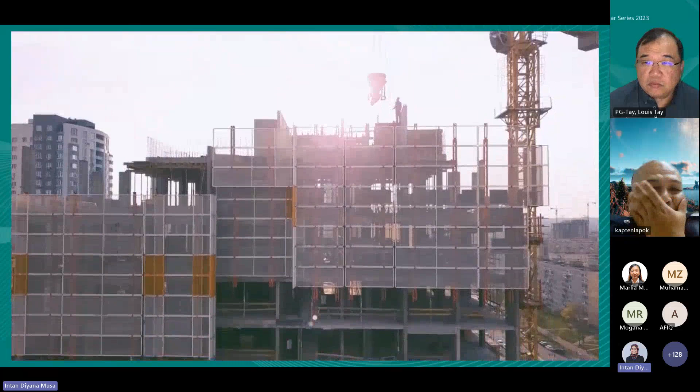Established in 2004, Construction Research Institute of Malaysia, mostly known as CREAM, is a subsidiary of Construction Industry Development Board, or CIDB, that holds the responsibility over all matters related to the planning, implementation, and management of the research and development projects and related activities.

With its mission to make CREAM globally recognized as the leading institute for research and development, R&D, and its vision to meet the strategic needs of R&D in the Malaysian construction industry, CREAM is committed to fulfilling its 5 objectives: to fund, manage, and execute research activities and programs; offer tests and laboratory facilities for heavy structure engineering and building materials that focus on IBS structures and components; establish R&D cooperation with stakeholders in the domestic and overseas construction industry.

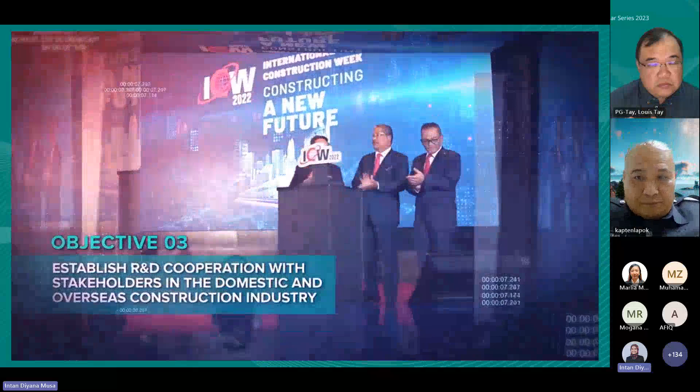Earn funds and offer ventures for R&D activities and programs, and distribute the latest technology and R&D products to the national construction industry players through promotion, patent, and commercialization.

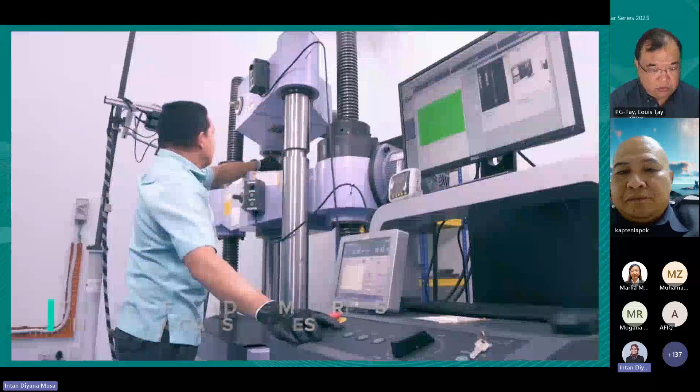CREAM serves as a key center that provides 3 main functions, namely research and development, testing of building materials and technical services, and assessment and certification.

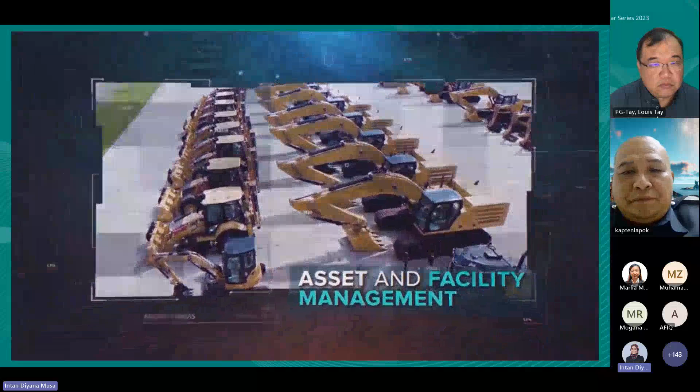CREAM's main focus is the R&D program, which covers various fields. Its objective is to provide benefits to the progress of the nation's construction industry. The research themes cover 5 priority areas: structural and material engineering, innovation and digitization technology, asset and facility management, environmental sustainability, and productivity.

Quality of service has always been CREAM's core value. This is to ensure that the Malaysian construction industry's strategic R&D needs are met.

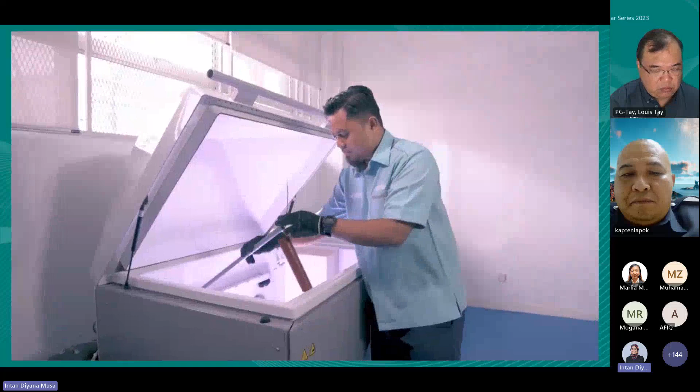CREAM also provides testing services for material and building structure samples at its laboratory, Makmal Kerja Raya Malaysia, or MKRM. The purpose of this testing service is to assess quality and safety, as well as to improve materials and construction samples to meet the standards set.

CREAM also offers services and other technical aspects such as inspection and sampling of imported building materials entering the country's ports. CREAM will conduct forensic investigations on construction sites in the event of failures or accidents.

CREAM is pleased to announce that the MKRM has been expanded to Sabah and Sarawak, and that it is now ready to assist industry players in Borneo with construction material and structural testing in accordance with CIDB Act 520.

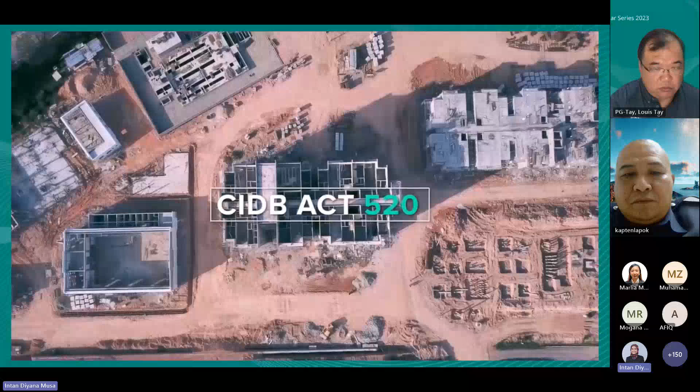CREAM Certification Services, CCS, provides construction certification services primarily for building materials listed in the CIDB Act 520. CCS performs an audit on the materials used in the production of product certification to ensure that the materials listed in Act 520 meet the standards.

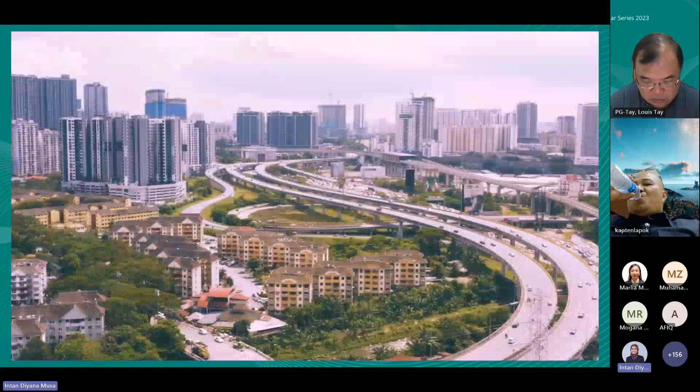CCS has gained recognition from the Malaysian Standards Department in August 2018. In 2021, CREAM was recognized as a Construction Assessment Center by CIDB. This recognition has enabled CREAM to evaluate and rate construction projects.

The evaluation covers 4 areas: quality, QLASSIC; safety, SHASSIC; green building, MyCREST; and infrastructure, sustainable INFRASTAR.

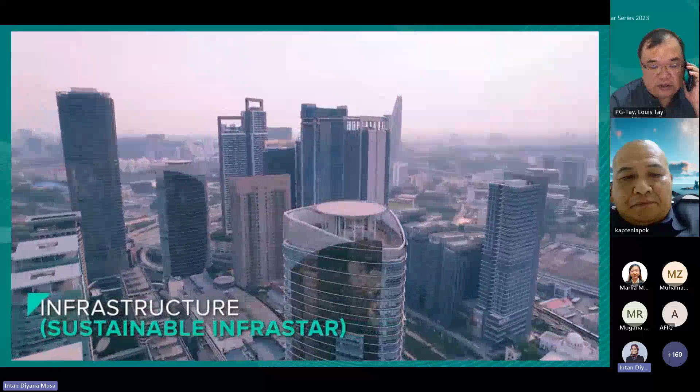CREAM is also responsible to carry out Certificate of Approval, COA, which is a certificate issued by CIDB to ensure that all imported construction products must meet the specified requirements of Malaysian Standard MS and other approved international standards. The issuance of the COA is in accordance with the Customs Act 235, 1967, Prohibition on Import, Amendment Number 2, Order 2014, to ensure the quality of imported construction products.

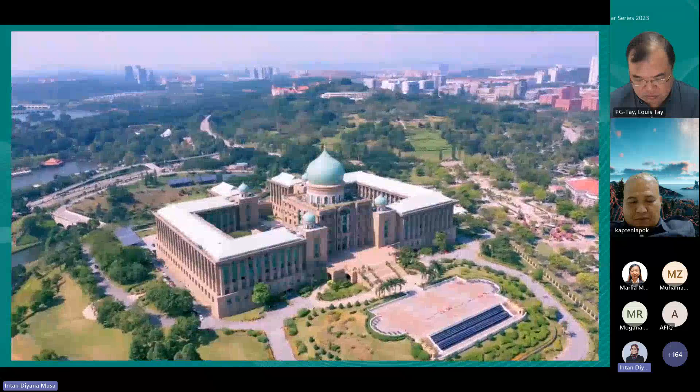To better serve the stakeholders in the national construction industry, CREAM established the Construction Industry Consulting Division, which focuses on industry networking and collaboration, as well as consulting services. The division aims to serve as a reference center and innovation hub for the Southeast Asian construction industry, ensuring economic and social responsibility in construction.

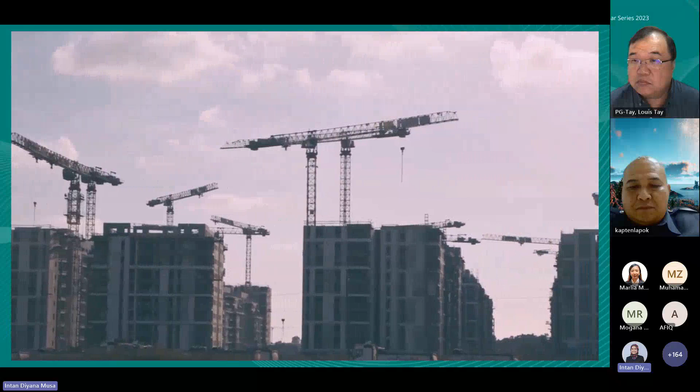CREAM is focused to be a leading-edge research institute for technology innovations in the construction industry, to act as a one-stop center for product inspection, testing, and certification services, to elevate safety, health, environment, and quality of the construction industry, to build partnerships with the industry stakeholders and researchers while exploring and encouraging the development of a knowledge-based industry.

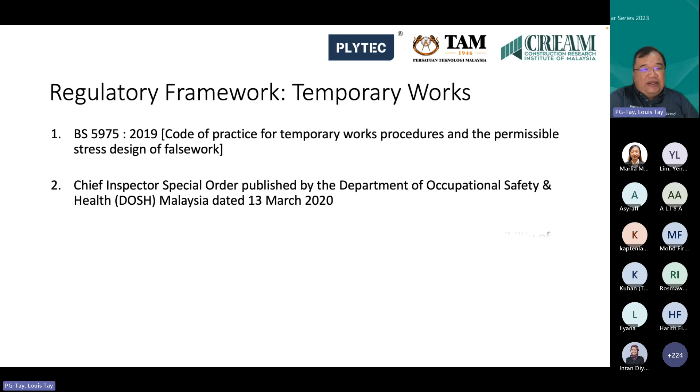This framework that I will examine today also includes the role of temporary works, the professional engineer for temporary work, which is defined by the Board of Engineer under Guidelines 001. And of course, we will talk about the construction industry standards, CIS, covering CIS 22 and CIS 23, which Ahmad has mentioned. But in fact, there is also a CIS 24.

CIS 24 describes the IBS system, and the IBS system comprises six kinds of systems, as you are aware. One of it is actually reusable formwork. So reusable formwork is a kind of falsework or temporary works, and it is actually governed under CIS 24 as well.

So this is roughly the framework, and it's more concerning the scaffold and falsework we're going to talk about. But when you look at temporary works or temporary structures in a broader perspective, there is much more regulation than this. If you are erecting a temporary structure as workers' accommodation, that's Act 446, and any temporary structures for occupation purposes are also temporary works, frankly speaking, and also has to do with local government regulation as well. But let's only focus on the perspective of temporary structures, which is falsework and scaffolding.

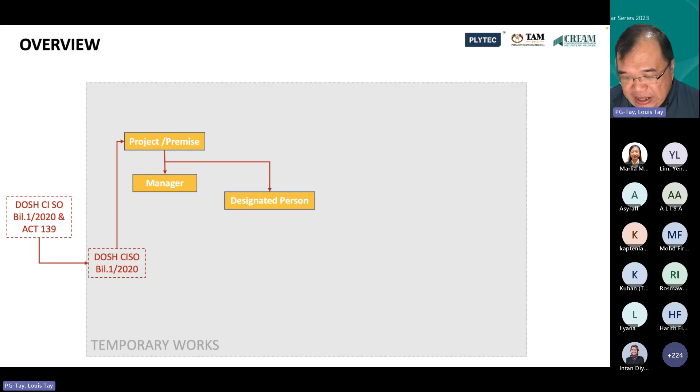So the most recent and relevant one, other than the CIS 22 and 23, is of course the DOSH JKKP Chief Inspector Special Order, year 2020. It is actually empowered - the fact that he can issue a special order because the Factory and Machinery Act 139 gives him this power. So he issued this special order, and bear in mind that under the new OSHA amendment, Act 139 is actually abolished. So there will be some amendment anyway, and there will be some more updates. I'll talk about the safety perspective, OSHA perspective, later.

But however, this document specifies for a project or a premise, there must be a pengurus, a project manager, and he must tetapkan one person to look after temporary works. So it also says that the pengurus has got the responsibility to make sure that it's a designated person, orang ditetapkan, and he has the responsibility to hire a PETW to design for his temporary works.

When the contractor undertakes a construction project, the permanent works - the structure, the school, the hospital, or the apartment he's building - the design is done by the PEPC, the submitting person for the permanent works. But the permanent works engineer, professional engineer, doesn't design for the temporary works. That is under the scope of the contractor. So this special order, Perintah, has specified this role. In other words, if you do not hire this, you can be charged, the project manager. If you do not appoint your designated person, you can be charged for this procedure itself.

And it also says that you need to implement a PTW system. So I just simplified this. Then again, what is a PETW? Professional Engineer for Temporary Works. Okay, it actually uses terms directly. These terms come from Act 138, the Engineers Act, which empowers the Board of Engineer to define PEPC,

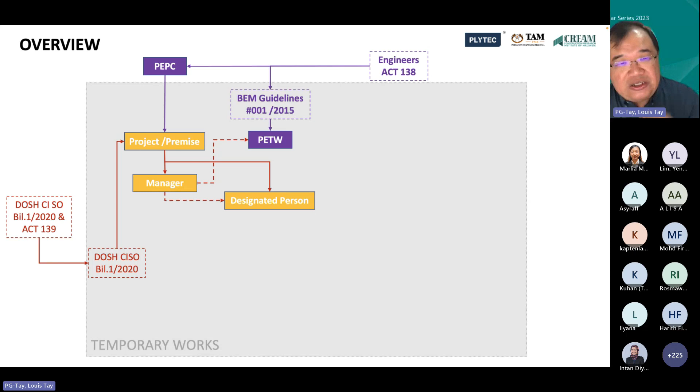and to define PETW under their 2015 guideline. I think it's 2015, if I'm not mistaken. So the PEPC, the practicing certificate - the PE practicing certificate - is the person who submits the project to the authority. But however, the PETW is another engineer that is hired to look after the temporary works during the construction process. So he's responsible for a different structure, same project but different structure. So this is defined by the Engineers Act.

And then we know that, okay, and all this role - you have PETW, you have designated person - what they are supposed to do, how they are supposed to design.

They will refer to BS 5975 traditionally, a code of practice for temporary works, and it has become an MS adoption. Now there is an issue when you adopt BS 5975. BS 5975 was mainly rewritten in 2019 to follow the spirit of CDM. In Malaysia, the CDM regulation or design for safety regulation is called OSHCIM, which is likely to be signed off as a regulation by January next year.

So when this OSHCIM is in place, it practically will replace the BOWEC, and then it will be aligned. So you can expect that a lot of related regulations will have to be rewritten because of the change in the OSHA and the introduction of OSHCIM. OSHCIM is a regulation under the new OSHA specifically for the construction industry.

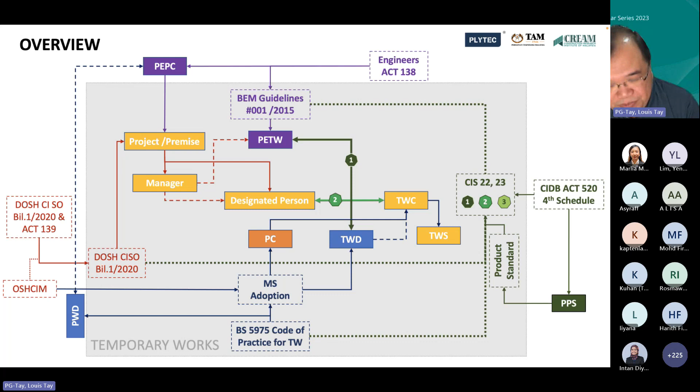The second relationship is, it further tells you that the orang yang ditetapkan, the person you either make in charge on site for temporary works, or you intend to send to jail because you don't want to comply with the regulation, is actually the TWC, temporary works coordinator. And the regulation further tells you that the main contractor, the principal contractor, has to have a TWC. The BS code refers to PC TWC and also other TWCs. So subcontractors need to have a TWC as well, but the regulation says there must be a PC TWC. Why? Because for different implementation risks, there is a certain level that only the PC TWC can sign off.

And finally, the third relationship says that the TWC and the PETW work in a team. If you are familiar with construction, you know that you have a structural engineer or M&E engineer, then you have a clerk of works on site. The clerk of works is actually the eye and the representative of the PE. However, the clerk of works cannot change the design. They make the inspection, they make reports, and they give the green light or put the work on hold based on the engineer's instruction. So it ties the PETW and TWC in such a relationship.

So if you look at the overall regulatory framework, the role of the PETW and TWC becomes inevitably essential to the proper implementation of temporary works.

And we are talking about safe constructions, bear in mind, and we are talking about safe use of equipment. So some of the regulation, for example, CIDB has been working very hard to come out with the CIS 22 and 23, but that is actually product compliance. The product can comply, but misuse of product doesn't come from the product. Misuse of product comes from the human.

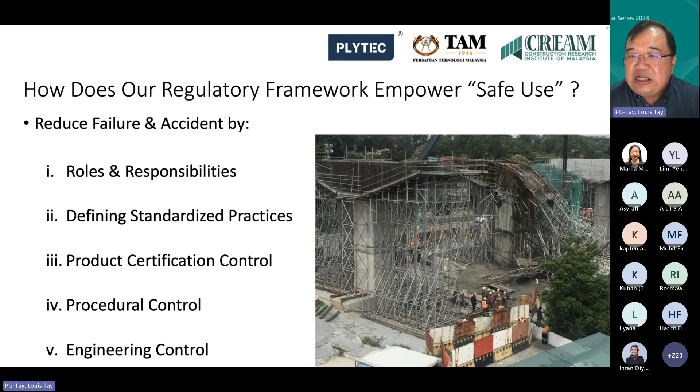So then it is very important to have control procedures. The control procedure comes from engineering control. So this is how this thing will be in place. So if you are managing a construction project or doing project management, ask yourself, are you only complying with certain parts of it? Are you implementing temporary works with these full 1, 2, 3, 4, 5 perspectives? If all these are clearly understood within your team, then you have a chance to practice good and safe constructions.

All right, so first of all, we talk about roles. Roles means peranan. We have tied this together. If you read from the right hand side, DOSH Special Order 13 March 2020, clause 1 mentions the role of pengurus, manager. In the other two documents, it is actually the contractor's project manager or principal contractor designated individual, DI. So these are equivalent roles.

If you look at the second one, under DOSH, orang yang ditetapkan, designated person, is actually the TWC. The term comes from BS 5975, and some countries practice proper training to certify TWCs. And we have put the same terms inside CIS 22 and 23, year 2021 version. These are equivalent roles. It's the same role actually, just given a different name.

And then DOSH talks about the PETW, Jurutera Profesional. That is actually the PETW, and in the BS it is the TWD. And finally, what DOSH didn't mention, which is fine because the DOSH order is for temporary works, is the permanent works designer, PWD, which in CIS 22 and 23 is referred to as the PEPC, the submitting person who submits the permanent structure to the authority.

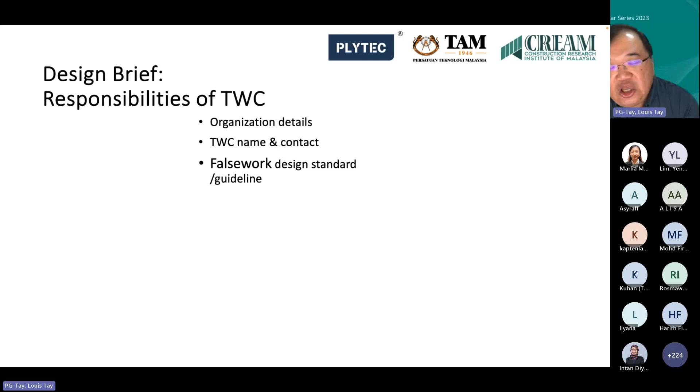And if this structure is PT, who is doing what role? And who is giving the final go-ahead to cast? Who is giving the final go-ahead to dismantle the formwork and things like that? So these are the procedures. What are the conditions of your works, the surroundings? And what is the design standard and guideline that is acceptable by the principal consultant?

So this design brief will outline all these things, and it's actually supposed to be prepared by the TWC. And the TWC is supposed to sign off. Either he signs off or he prepares, but he could actually ask him to prepare. There is a lot of information he has to provide to the TWD, the PETW. The PETW is another human like him.

You cannot ask that human to design the temporary works safely without giving him the information like what is the soil data, what is the strength of the soil that the falsework is going to sit on, and without telling him what timing you require, do you require early stripping and things like that, without telling him the construction program, how you want to zone out the casting sequence. So that is not possible until you produce a design brief.

And that is actually the temporary works coordinator's responsibility. And he also needs to identify site and environment constraints. Now we are talking about temporary work structures like falsework and scaffold, but temporary works include excavation, slope work, and all these things.

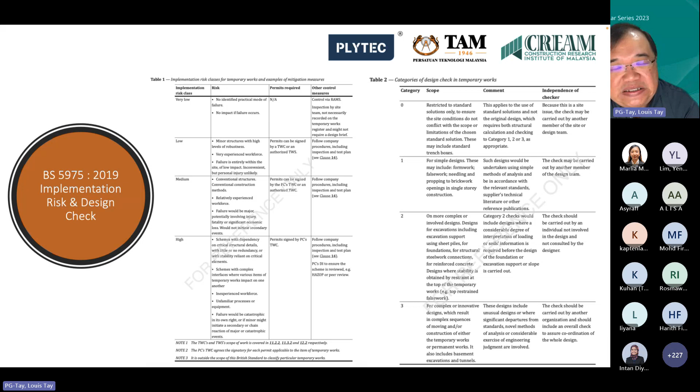Table 1, on the other side, talks about implementation risk. If the risk is very low, for example, you only need to control via standard documentation and inspection by the site team, not necessarily recorded, and not necessarily by the TWC. But if it's low to medium risk, the PC's TWC will be involved. But if there's high risk, the permit can only be signed off by the PC TWC, meaning the principal contractor's TWC. He has to be the most qualified person. So these are the control requirements.

Then we talk about roles and responsibilities. Now we also talk about product standard control. These are product controls. CIS 22 and 23 have outlined all kinds of product control, and the telescopic prop EN 1065 has been adopted as an MS standard.

16031, the number 4 aluminum prop, is just almost the same as the steel one. I'm not sure that it is adopted or not, but I was in the 1065 committee. I'm not sure we talked about the aluminum one. I just couldn't remember, but it will be the same. Okay. Next slide.

Now when you talk about product control, product compliance, it will very much depend on what your product is used for. There are products, for example, modular scaffold product, MS1462 Part 3 and 2. This product is designed according to 12810 Part 2. And when it is declared as a scaffold product, it is tested in this way, the 3-bay method.

The similar product, when you are saying that you're using it for shoring, at the moment the only relevant standard is the testing standard of the shoring tower, which is 12813, and it actually tests it in a different way. For the same product, it's testing a 5-meter tower and things like that. Unfortunately, most of the shoring products that come in modular and tower are actually proprietary designs, so there is no universal standard. MS1462 Part 3, Part 2, or MS1462 Part 1 and 2 for A-frame and tubular, they are actually universal product specifications.

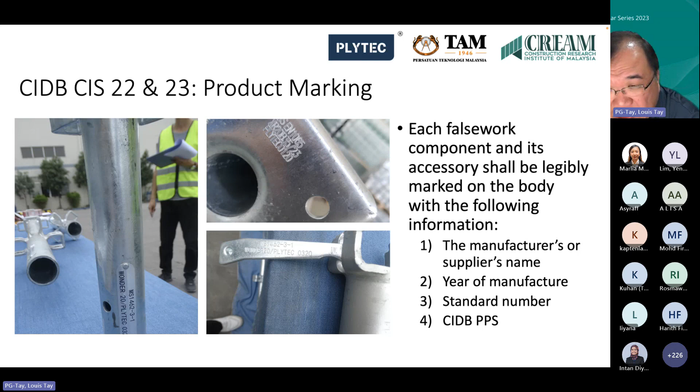So how does this help? This helps to eliminate substandard products from the market. And it helps project personnel to identify whether your product is complying. So you don't need to guess, because it is actually marked on it. And there's a yearly assessment inspection you need to do.

Now from product control, we come to procedure control. Procedure control is a very important element of BS 5975, and it should be well adopted. Part of it is already written into the special order by JKKP. It says the PM has to appoint the PETW and TWC, which is aligned to that principle. The PETW approves the TWC. So you cannot just give him anybody as a TWC.

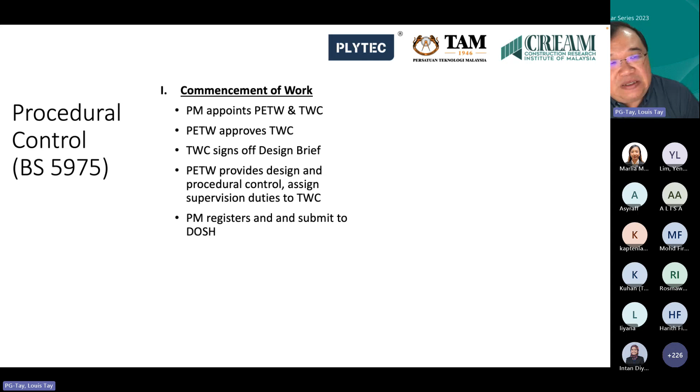Because the TWC, orang yang ditetapkan for the temporary works, is actually acting as the representative of the PETW. So he has to know his capacity. The TWC must sign off the design brief before the commencement of the work. The PETW must provide the design and procedure control and assign supervision duty to the TWC. And under the context of Malaysian regulation, the PM needs to register and submit to DOSH your project team and all these designs, even the PETW design.

Then the TWC needs to report to the PETW if there are any changes before you start the work. Because three months ago you started the work by saying that you're going to cast the concrete of the transfer floor, which is 800 mm thick. Today the design has been changed. Your owner doesn't want to use PT anymore. It has become 1.5 meters deep. So if that change is not updated to the PETW, your design of the shoring structure will be under capacity to carry the increased depth of the concrete, and that is not increasing by a few inches. It's increasing by half a meter and more.

So these are all the things that need to happen before commencement of work and during the progress of work. These control procedures combine both BS 5975 as well as the standards by the JKKP. So you need to adopt a PTW system, permit to work system, and it is actually the same as mentioned in the BS. You need to implement stop points, a checkpoint system. PTW is actually a checkpoint system, where you must check before you can proceed.

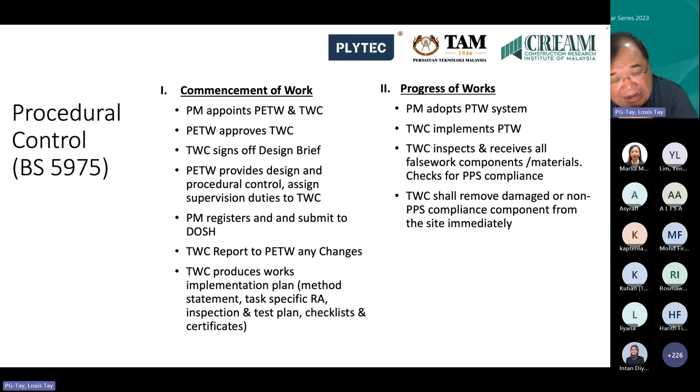The code of practice says that the TWC shall remove damaged or non-PPS compliant components from site immediately. You receive it this morning, you get it out this afternoon. You cannot give the excuse, when the enforcer comes, that this one you rejected last month. Then you're not doing your work, because your duty says that you have to reject. You cannot allow them to be inside. So if we as an industry understand these things and put them into practice, our site and our work will be very safe.

And back in 2021, the CIS 22 and 23 also talked about the initial site quality check and scheduled site quality check. This is mainly to sample the product and do some basic checking on component strength and things like that. Then you introduce the Falsework receiving inspection form or equipment receiving inspection form, and the TWC needs to sign off all the PTW. And the TWC needs to update all records to the PETW. He has to keep the PETW informed.

What happens in our market today is the PETW never knows what happens on site and never cares to know. Without knowing that they are responsible for what is going on with their design, they are presuming, because conventionally they have designed the work very safe. So they think, my design is safe, I'm only responsible for design. But now under the code of practice, you must understand that you are responsible to communicate with the TWC.

The TWC cannot override your design. If you have designed a tower that is 1.5 meters wide, you cannot suddenly change it to 2 meters wide because the strength will be different, and the TWC has no right to approve it. So the PETW needs to keep being updated on what's going on on site. Traditionally, no PETW had been charged for failure until there was a case last year. The PETW was charged, and it was proven that his design was insufficient.

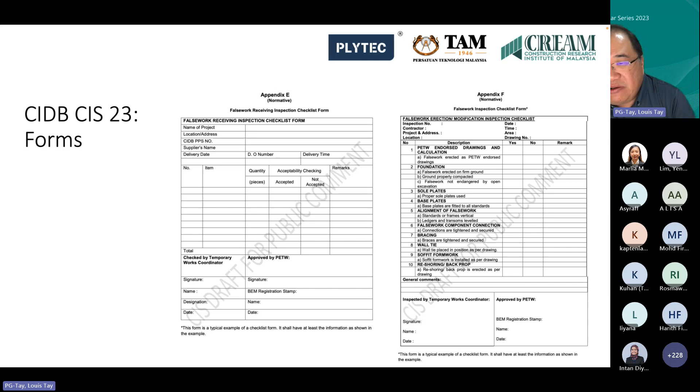You ask yourself, how do you ascertain that this used product that looks very fishy to you is actually in functionable strength? These are the things you need to decide. There are also some forms you can use - I'll show you an example of whether you check these things before you implement the work.

Now we talk about multiple elements to make the regulatory framework perfect. We need to understand the role and the responsibility. We need to have standardized practices. We need to have product control, and procedure and engineering control.

Even when the engineer tells the PETW to design the falsework for us, they will go to the section where the design is discussed. Most of the time they just go and pick up the safety factor required for a certain load, and they care what kind of load for what kind of thickness of slab they're going to support.

But there are other clauses so critical for TWC, for anyone doing formwork, to understand. First, the TWC should ensure that if the design is done based on 5975, under one of the design clauses you assume the concrete is not dropped for more than 1 meter high, because there will be another loading on the formwork and falsework.

Do you know that? Does the contractor know that? Does the TWC know that? Nor should concrete be allowed to heap with surcharge of 600mm or not more than 2 times the slab thickness, whichever is smaller - which means if your slab is 300 or 200mm thick, you are allowed to heap up to 400mm only.

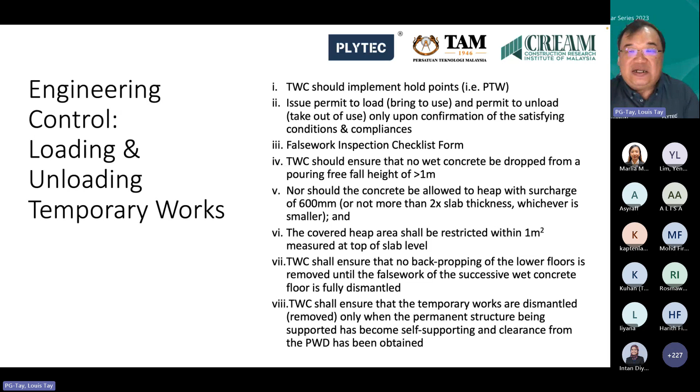The TWC shall ensure that temporary works are dismantled or removed only when the permanent structure being supported has become self-supporting and clearance from the PWD has been obtained. This part is interesting - the TWC reports to PETW, but when your structure is cast and ready for the temporary works to be removed, the final say on whether it's okay to remove them is the other engineer, the PWD, the permanent works designer. That's because it's his structure - he must be happy that his structure is strong before you can take away your temporary structure.

So these are some kinds of engineering control that at the very minimum we must understand. And why are procedure and engineering controls crucial?

I'm not sure of this case, but I think the final endorsed version of the erected configuration was endorsed by PETW. If this is the case, the contractor erected according to the design, and when it failed, it's actually the design that is insufficient. Even if the product has PPS - if the product has no PPS, the designer, the PETW, will still be charged because it's your design. Whatever design you do is your design, and the contractor will be charged because of no PPS as well. So there will be two different offenses.

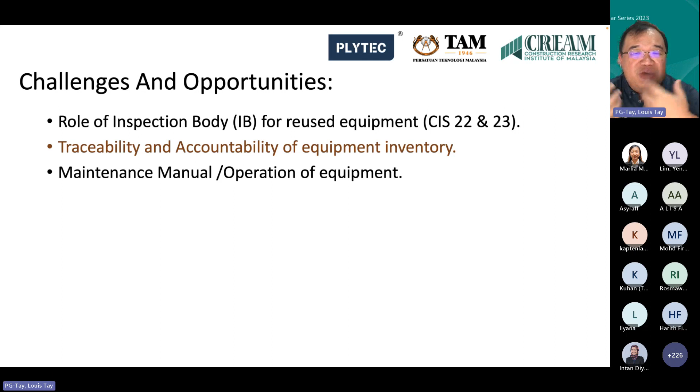So maintenance manual and operation of equipment - when you come to use equipment, you surely don't expect the inspector to base their inspection on the condition of new equipment. So to what extent rustiness is acceptable, to what extent wear and tear is acceptable, that depends on the manual, your maintenance manual.

So certain part of the inspector's work is to inspect whether you comply to your own product maintenance manual. Do you have that? That is another question. So these are all the challenges and opportunities in the market. We have product specification for scaffold, but we are lacking product specification for shoring and falsework, because a lot of them are proprietary. So maybe it's high time that we create those standards.

I presented to you that if you are testing a falsework shoring tower, it has to be a 5-meter testing facility and things like that. And we know very well that we are lacking that. Other than one or two places, nobody can do that.

And some manufacturers set up their own testing at their own place. Again, if you read CIS 22-23, it says that the testing has to be done by a SAMM accredited body. Are you accredited? Of course, then you can go and get your accreditation. But bear in mind, if you just go and get accreditation for a single piece of testing equipment, there is a lot of procedure you need to comply and prove to JSM. So does it worth that or not?

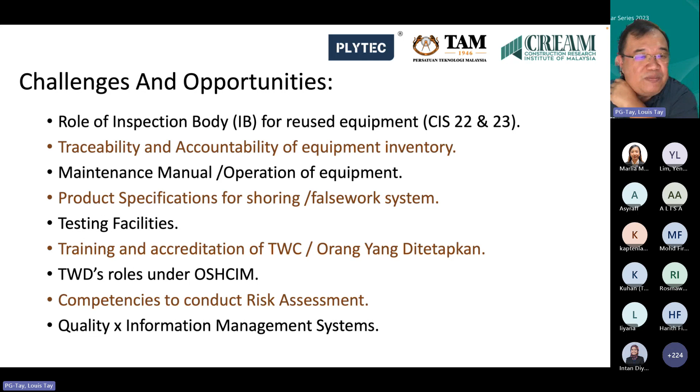The only chance that you can influence safety is before you implement the work, by doing better design, selecting better resources and better equipment. So that is the spirit and the philosophy of OSHCIM.

And this is also why, in order for OSHCIM to come into place, our OSHA Act was amended in 2022. It changed from the Factory and Machinery Act 1967 to 1994. 1994 is where we have our first OSHA Act. And then last year, we amended the OSHA Act again. So when we amended the OSHA Act, we actually repealed the AKJ, which is the 1967 Factory and Machinery Act, Akta Kilang dan Jentera. And we added new clauses into the OSHA, making it very comprehensive. The main reason for doing so is, from the very beginning, the Factory and Machinery Act 1967 was prescriptive.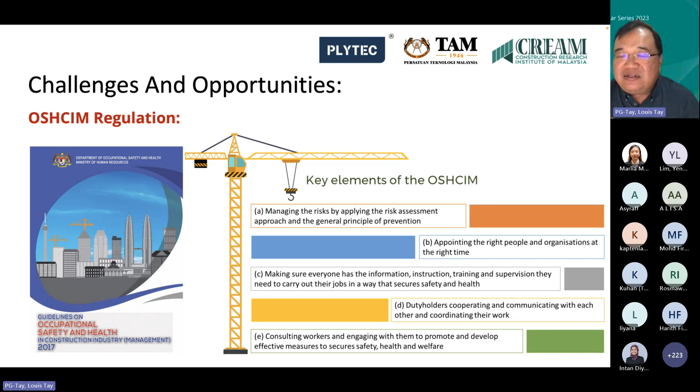And finally, in my final slide, there are several other elements that are quite important in OSHCIM, but anyway, we are not talking about OSHCIM today. Why I mentioned OSHCIM is because it's coming into the regulatory framework. And finally, the title of the webinar series talks about safe constructions.

So when we talk about safety, the philosophy, the hierarchy of safety control and management is actually 5 principles. The highest one is what you want to do. The lowest one is you have no choice, the only way, because you know there's a risk. So no choice, you have to wear the PPE. You have to wear a hard hat. Why you tak payah pakai hard hat dekat rumah, you kena pakai hard hat dekat construction site? Because you know that there is unavoidable risk. But that doesn't mean that apa yang akan jatuh itu tak akan jatuh just because you wear a hard hat, right?

That is very passive. So that is the lowest reliable control. But you have no choice. At least it helps. Okay. Then what you want is, under the five principles of control, the best is the prevention principle, which is the top two, elimination and substitution. And then engineering controls are necessary, and administrative control.

But you look at the temporary works framework today, the regulatory framework we talk about. As of now, we actually cover it quite well. In Malaysia, we have all this at different levels. The CIDB Act 520 is very much an administrative control that tells you that the equipment you use must be inspected, must have marking, must have PPS. However, that administrative control will not avoid misuse if the human is not controlled.

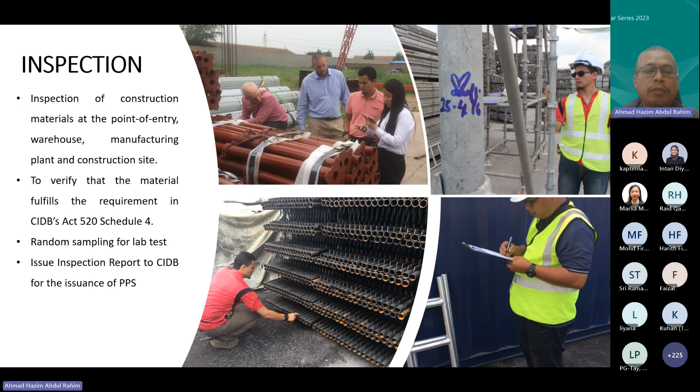Okay. Regardless whether you go by the long-term approach through product certification, or the short-term approach by consignment basis, or to get a PPS for your used product, laboratory testing is a prerequisite, is a must. So prior to issuance of product certification or inspection report or PPS, the product needs to be tested in an accredited laboratory, at least. So CREAM is one of them through our Makmal Kerja Raya Malaysia.

So a little bit of introduction about our lab. We call it MKRM. It was established in 2009, right? The main function initially when it was first established is to support CREAM R&D works, because CREAM is a research institute under CIDB. Okay. And of course, since we have the facilities, we support other CREAM services as well, in this case inspection and certification, right? And on top of that, of course, we provide services to Malaysian industry players.

Okay. Initially, when we first set up this lab, it was meant for big component testing or big scale structure testing or IBS component systems. But at the same time, we do provide services for scaffolding, falsework, material testing facilities, and whatnot. Most of the 90-plus types of product listed under Schedule 4, we are capable to do the test, right? Some of the photographs of testing products that we have tested, ranging from scaffolding until a big component test, a precast component, right?

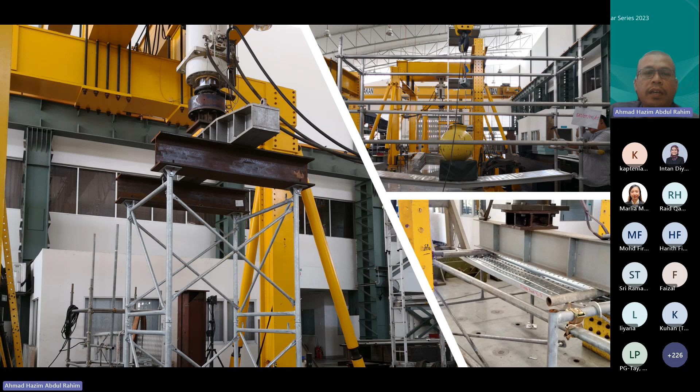And yeah, some of the precast elements that we have tested, also some scaffolding components. And recently, we also embarked on railway infrastructure testing facilities, right?

Okay, previous speakers have touched on the incidents that happen at construction sites, maybe involving scaffolding or falsework, or perhaps other construction materials. From time to time, CREAM technical personnel or experts are also called to accompany CIDB to go and investigate some of the cases and bring back some samples to the lab for testing and verification, and we assist CIDB in coming out with their case, right?

Okay, now I will talk a little bit more about what we have here that can assist you with the test of scaffolding and falsework. Now I zoom into scaffolding and falsework testing. Okay, if you look at CIS 22 and CIS 23, these two standards were published through various engagements with the industry players, particularly in scaffolding and falsework. So I would say that this CIS document is a very strong document to supplement other documents that Mr. Louis mentioned just now, not only the standard MS1462, but also the documents from DOSH as well as BEM, right?

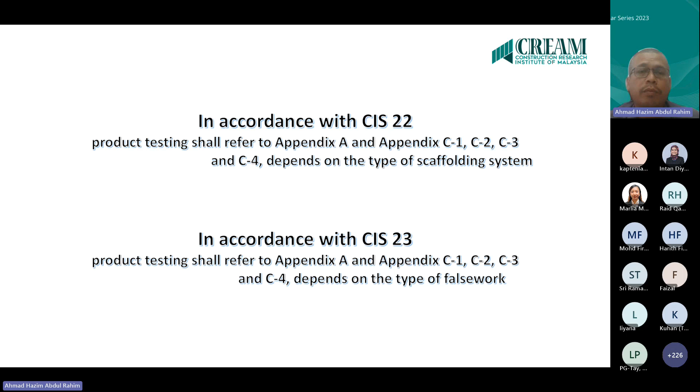So the requirement of testing is stipulated in Appendix A and Appendix C in both CIS documents, right? So we start with CIS 22 first when it comes to prefabricated A-frame scaffolding system. So this is the requirement of testing for A-frame.

Okay, before that, I must say that scaffolding or falsework is a very unique material, not found in other construction products listed in Schedule 4, because it involves a lot of testing, from material test to component test up until the full-scale structural test, and it also involves tests to be carried out for new as well as for used materials. So it's a very unique and interesting product that our lab has been dealing with for many years, right?

Okay, dimension test is one of the requirements, as you can see there under clause 5.1 of MS1462-1. In fact, all the components' dimensions must be verified. It's part of the requirement when we issue the test report. And of course the critical tests such as tensile test, for global bracing, for side protection, for toe board, all must undergo tensile test. Tensile test is a very critical test. It falls under critical test lah.

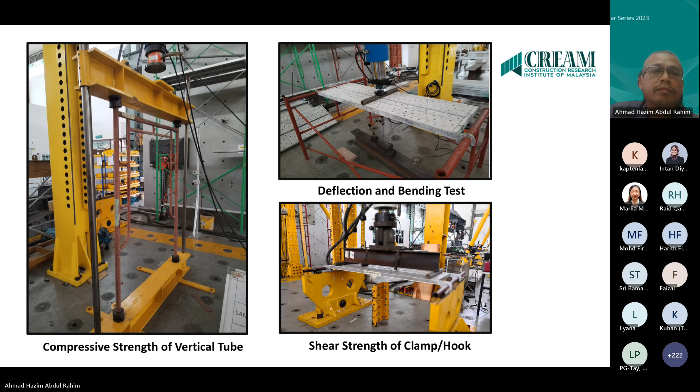All the accessories, including the adjustable jack base or adjustable U-head, or the coupler or even the wall tie, need to undergo certain types of test listed in the annexes under MS 1462. There are so many: annex J, N, K, L. They are divided into L1 and L2, and annex M for bracket load test.

Okay, do you need to do all these tests? It depends. Whenever the inspector goes to the site, it depends on your declaration as well. And if the inspector or the auditor finds out that you need to do this test, then you need to send the sample to the lab for testing. Okay.

We apply load at certain points of the scaffolding, and we do it until it fails. So it is a destructive test. So it is quite hazardous whenever we do this test. Normally this test will take some time to be completed, including the installation as well as the dismantling of the works.

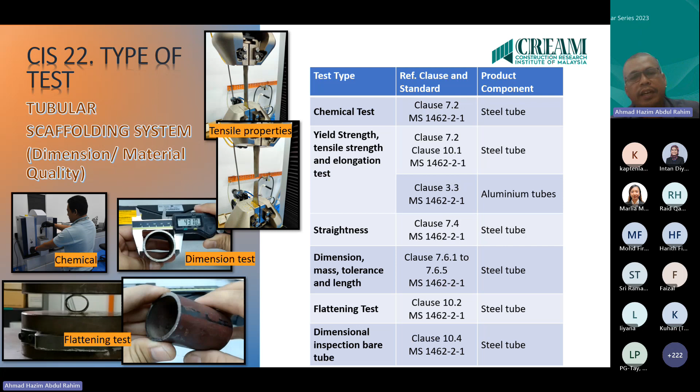Okay. Again, for tubular scaffolding system, these are some of the tests that you need to consider. Chemical test, tensile strength. Of course, while doing tensile strength, we obtain not only the tensile strength but also the yield as well as the elongation properties, right? And for tubular, we also need to measure the straightness on top of the dimension and the tolerance. And of course, another test is the flattening test, right? So we need to measure the crack properties of the tube.

Besides that, the corrosion test will normally take about 500 hours to be completed. So imagine. The frequently asked question our lab receives is how fast you can complete the test. My answer is it depends on your products. So if your product includes a coupler, be prepared for a longer time. We are talking about 2 to 3 weeks, if everything is in order, all right.

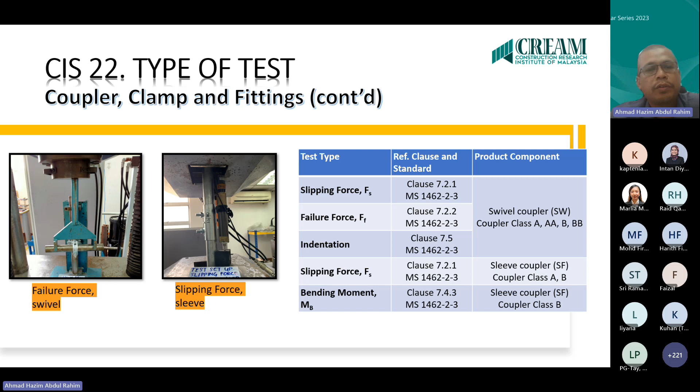Again, some of the coupler tests include slipping force, failure force, indentation, right? These are some of the actual samples that we have tested in our lab, as you can see on the left side of the slide presentation. Okay, and also strength test and slip test in a different configuration. Even for swivel flange clamp or for putlog coupler, there are test requirements listed in certain clauses under the standards. For putlog we refer to BS 1139, so it's a different standard altogether. And we use the Australian and New Zealand standard for swivel flange clamp.

So usually we refer to this standard because of the absence of a Malaysian standard. As long as there are established standards in the world, we will follow those established standards.

Okay. When it comes to facade and modular scaffolding systems, again, similar tests. These are all critical tests: dimension, tensile on the tubes, even on the stairways. Yeah, stairways also must be tested, not only on dimension but also on the strength of the stairways. The photo shows the load test on stairways. Actually, it's not a static load. It must undergo dynamic load to represent the actual performance of the staircase while under use at the site.

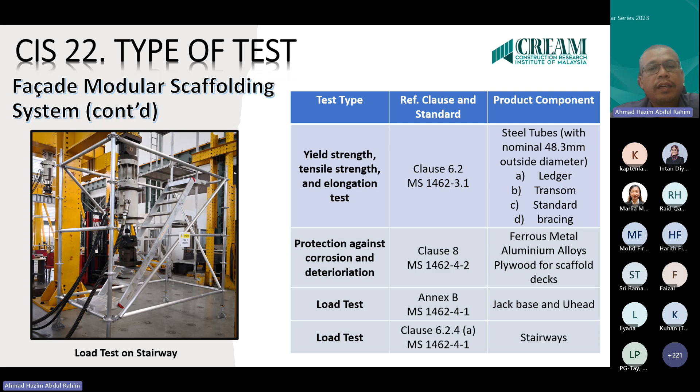And the protection against corrosion and deterioration also needs to be investigated, and of course load test. And the side protection and platforms and also their supports need to be tested, including downward loading, horizontal loading, upward loading. And of course, for platforms, we have different kinds of loading conditions: concentrated load with certain sizes, and also UDL, uniformly distributed load. So it is not a straightforward test when it comes to scaffolding and falsework. There are so many tests that need to be carried out, considered, and of course passed before CIDB will issue you the PPS.

Again, some of the photographs highlight the actual tests we conduct at the lab. And of course, for modular scaffolding, we also need to carry out the elastic buckling load factor test. Basically, in order to carry out this test, we need to install a 3 bay by 3 lift modular system, and we apply load to each leg, and it is a destructive test as well. We capture the failure load, the maximum load, and compare it with the design that has been submitted by the designers.

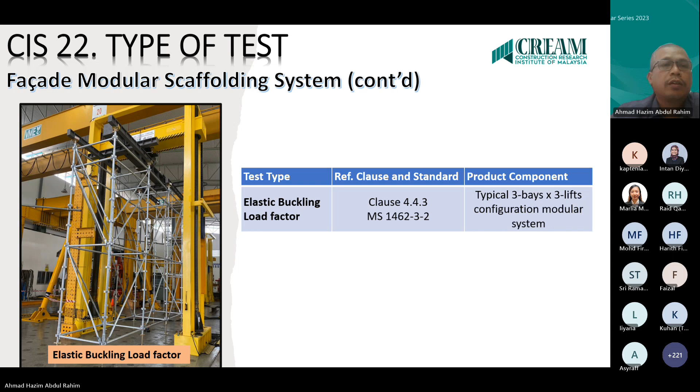Okay, for CIS 23 for falsework systems, the critical test requirements are more or less the same, whereby we need to do chemical tests to determine the chemical properties of the products, as well as the tensile properties, which include yield, tensile, as well as elongation, right? It's almost the same as CIS 22, but there are some differences. For falsework, there is a requirement to do the high tower test.

This is one of the challenges highlighted by Engineer Lewis in his slide, because there are not many labs that are able to do this high tower test, right? Even in our lab, we are capable to do this test, but some suppliers and designers come up with a very tall falsework. So there we have some limitations. Our limitation currently stands at below 6 meters. So the ideal height that we always give to the industry is about 5 meters. You need to erect about a 5 meter high tower in order for us to do the load test conveniently.

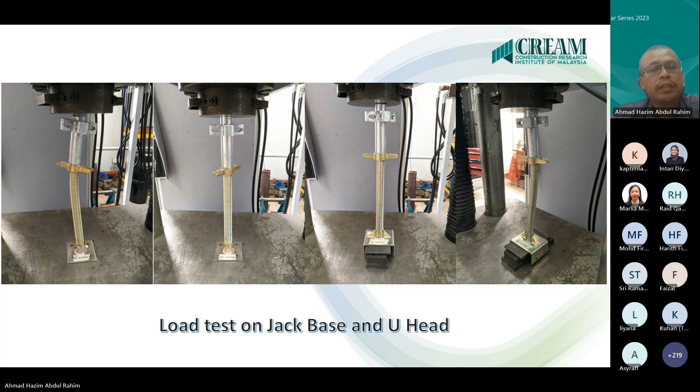And also, of course, some photos on the accessories like U-head and jack base. It is again a load test, a destructive test.

One of the things mentioned in CIS 23 is the steel props, which is not available in CIS 22. But again, steel prop is a very unique material. It can also be found in CIS 24 because this is part of the formwork system. So steel prop has an individual standard by itself, which is MS 1065.

The test requirements under 1065 for steel props include 3 main tests: the actual characteristic strength test, the pin strength test, and last but not least, the prevention against unintentional disengagement test. So the test method for steel prop is well established. If your products deal with steel props, they can be certified by our product certification or certification body because there is an established standard for this product, and our lab is capable of doing that as well.

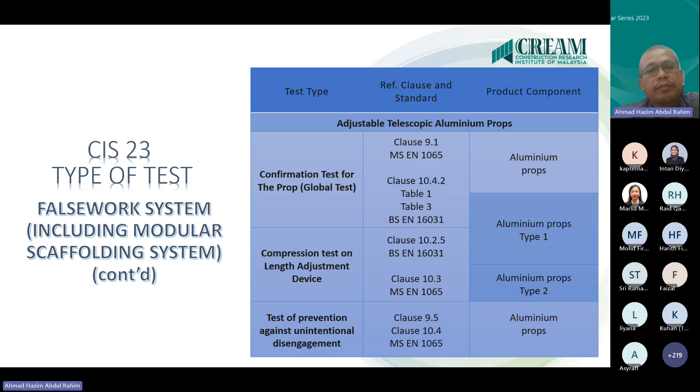For others, even for aluminium or adjustable telescopic aluminium prop, we refer to the same standard, MSEN 1065, but also we refer to BSEN 16031 for the testing requirement. But more or less it's the same. Similar to CIS 22, critical tests include chemical tests, tensile stress, straightness, dimension, flattening, and so on.

Same also for the global test procedure for falsework for tubular scaffolding system. They fall under clause 13 of MS 1462 Part 2-1, as well as Annex B of BSEN 12813 for high tower test. And again, same for the accessories like couplers, clamps, and fittings. The need to do slipping force test, failure force test, and indentation is spelled out in MS 1462-2.

Besides doing the test in our KL lab, which is the biggest one with the most facilities,

we also have 2 more labs in Kuching and Kota Kinabalu which can accept requests from the industry. If you're in Sabah or Sarawak, where I know scaffolding and falsework usage is very active, especially in the oil and gas sector, you can approach any of our branches, whether in KL, Sabah, or Sarawak, or contact me through the email and phone number provided.

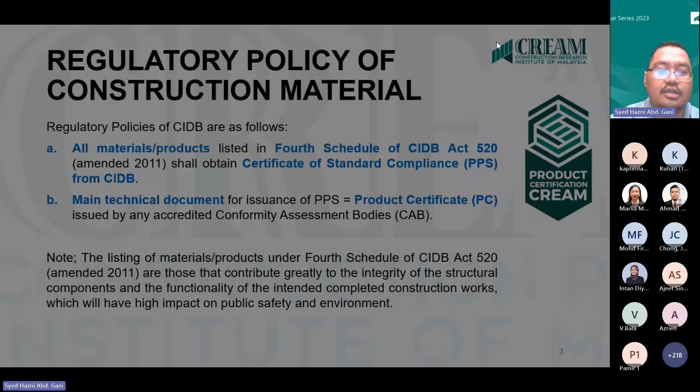This shares one of the requirements, in Malay called punca kuasa. Under Act 520, for any product you need to get product certification: 33C(1), 33D(1) and 33D(2). I think this was already mentioned by Mr. Marwan. This is just to share with all participants which punca kuasa we can use to get the certificate of conformity, or perakuan pematuhan standard.

What is the framework? Where do you need to get product certification, and where do you want to have the perakuan pematuhan standard? This is a framework established by CIDB Malaysia. First, when your product is listed under the Fourth Schedule, for example scaffolding, which includes modular, tubular, coupler, and also A-frame, you need to get product certification from a certification body like CREAM, because CREAM is a one-stop center.

We can do the product certification together with testing, as mentioned by Encik Hazim. This is good for the industry - in one window, you can get both the testing result and the product certification. Then after that, you need to get your perakuan pematuhan standard from CIDB through the CCPM.

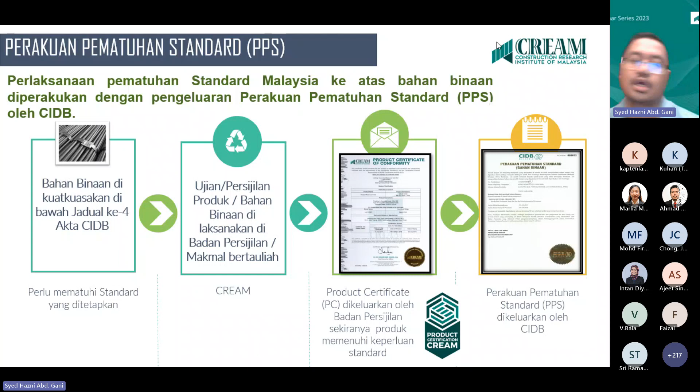For your information, CREAM certification services, as mentioned by Madam Diana, we already established and got accreditation from Department Standard Malaysia ISO/IEC 17065 in 2018. We are the only certification body that focuses on construction material. Our products cover building material, construction material, and other products related to the construction industry, especially under the Fourth Schedule.

This is our focus. What is product certification? I think some of you know product certification is where an assessment party confirms that specified requirements have been demonstrated. We base this on ISO/IEC 17065, and also on the product standard. For example, scaffolding has some requirements for testing and some requirements for marking - we need to look into this and comply with the requirements of the standard.

So what's the benefit? I think it's just to give you some idea. First, to confirm your product meets the regulatory and national standard. I think complying with the construction industry standard is very important because it regulates, builds confidence, facilitates, and boosts the industry. These are some of the benefits of product certification.

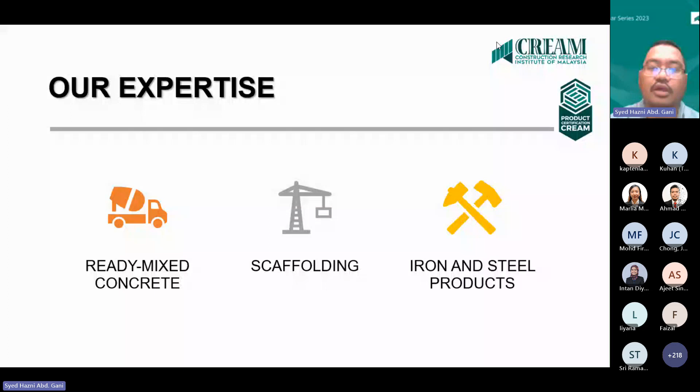What is scaffolding? I think it's already been mentioned by Mr. Marwan, Mr. Luis also mentioned about scaffolding, and Mr. Hazim also mentioned about scaffolding. So these are some standards you need to comply with when you want to use or erect scaffolding in Malaysia in the construction sector. We have the series MS 1462, together with CIS 22 and CIS 23.

All this is applicable to all local and foreign manufacturers. Either you are a local manufacturer with a factory in Malaysia, or you want to import from other origins, you need to have product certification and also the perakuan pematuhan standard.

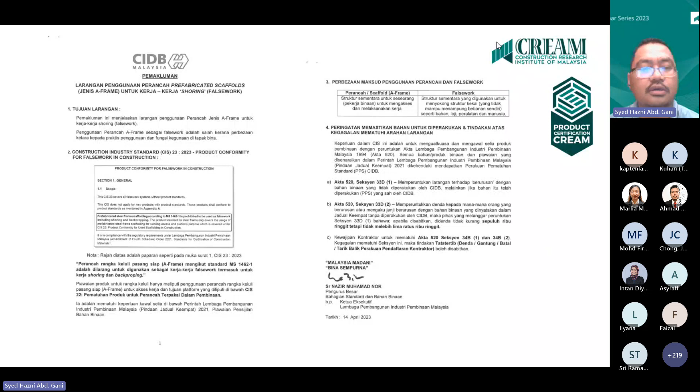Okay, first, when you give an inquiry to us, we will issue the quotation. Then you need to do all the submission of the application. So when all the application is completed, we will do the document review.

Why do we do the document review? As a practice, as the certification body, we need to make sure your readiness for the certification - your product, your documentation, your record is there. Then when your readiness is confirmed, we will conduct the factory audit.

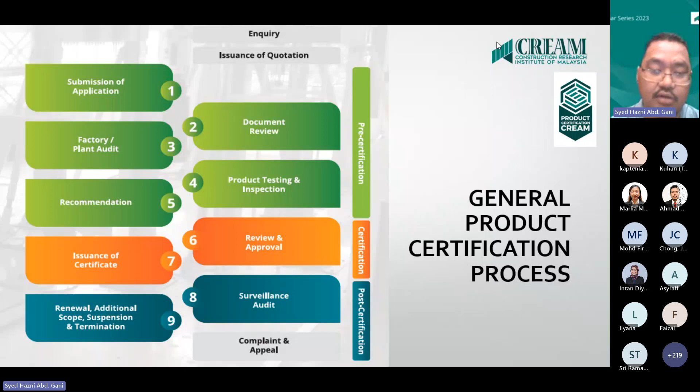Product certification - what we do under product certification: basically we look into your product, factory production control, quality system documentation. We also look into product quality, production quality control, product calibration, handling of non-conforming product, and handling of customer complaints.

During inspection and testing, what we do first is organize the mission for formal evaluation. We look into your measurements, test gauges, calibration on your equipment - whether already calibrated or valid. We compare to the specified requirement and standard to determine whether the item or activity is in line with the target.

Meaning the target, the requirement of the standard. For example, the standard says you need to conduct testing every 1,000 production units, you need to have the test. So we will look into the record and do the verification.

So for the testing, either you send it outside to a third party, we also look into your QC check - internal quality check. So internal quality check, we will look into your requirement - whether you fulfill the specified requirement under the standard or not.